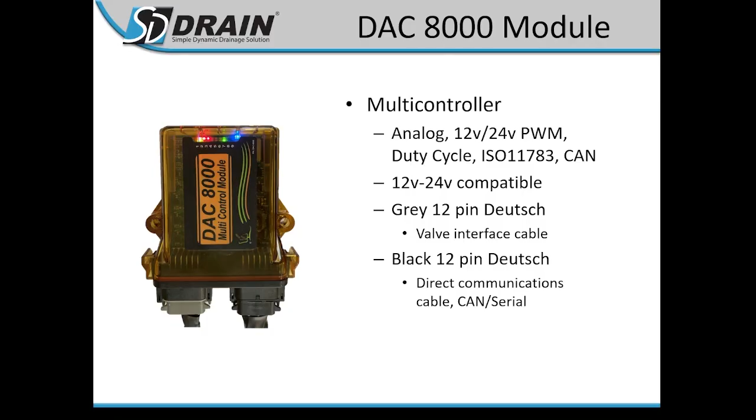Attached to the controller are going to be two plugs. There's a gray plug and a black plug. The gray one is going to be your power and valve interface cable, and the black one is going to be your communications cable. So if you're running a slope sensor for slope compensation or control, you guys plug it in there. Also for your GPS, so if you have a John Deere globe, you plug your GPS into the controller, and then everything is streamed to the monitor wirelessly. So just check that out, make sure you guys have that in the cab when you're setting up for the year.

Support, we have a couple options for you guys. We have sddrain.com. This is a website you guys can go to, and in the top right corner there is a menu. Hit the menu in the drop down, and there's a troubleshooting tab, a resources tab, a training tab, stuff like that you guys can go to, and we'll cover that here at the end.

But just wanted to let you guys know about that. We also have the online chat windows, that's the Let's Chat icon for quick questions. It's not necessarily our main tech support, but if you've got questions, just chat in there and we can help you out.

Otherwise, for hotspot support, we utilize an internet hotspot, which is a subscription you have to pay for on your phone, so check if it's unlocked with your provider. But if you've got it, we can use your hotspot to connect to your computer. Turn the hotspot on your phone, connect it to the SD drain tablet, and then click on the icon on the left, down here on your desktop. Click on that and it will open up. It'll give you an ID and a password. You will then give that to us when you call in, and we can log on and help you out with any problems you might have.

John Deere installation for guys running green tractors. On the back of your tractor, sometimes you'll have to remove the slow moving vehicle sign. It's a 10-pin MetroPack connector. When you plug our harness in, the valve interface cable into your tractor, and then provide power, turn your key on, what you'll see is auto with a line through it on your SCV screen. For some of the older tractors with the SCV screen in the back right corner, you're going to see EC on that number 1 hydraulic. That just indicates our controller is plugged into the tractor. If you don't see any of this, likely something is wrong. Power cycle sometimes works. Check your pins, check power, and double check some stuff. But when you turn the key on, you will see auto with a line through it. And remember to have your John Deere tractor off when you're plugging in that cable. Everything off.

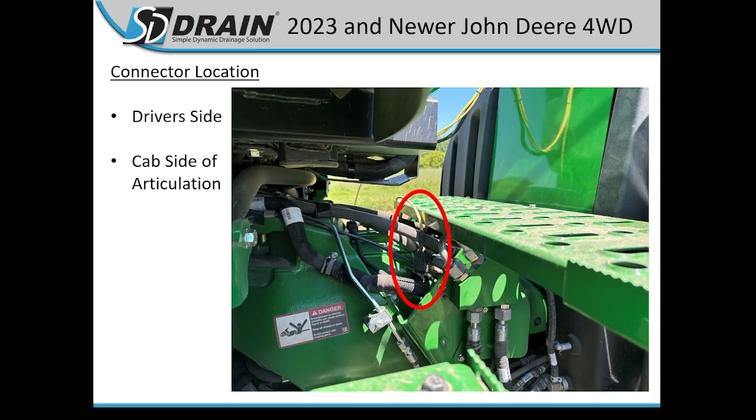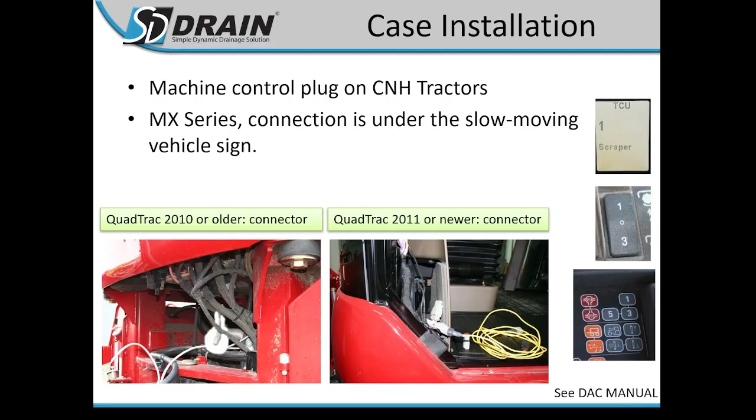Case installation, guys running red tractors. 2010 or older, the connector's on the outside of the cab in the back passenger corner. It will be draped somewhat like the picture on the bottom left. 2011 or newer, the right picture is all inside - open up that big door and you'll find that six pin connector. Again, it's just plugging a cable in. On the right side, we've got 2 pictures of 1-3 switches. One of them, that top 1-3 switch, or the middle picture, is an older style, 2010 or older I believe. 2011 or newer is going to be all of the keypad style, the bottom picture. So making connections, and then showing you the place where you enable your cutting blade.

AFS Connect cabs, front wheel assist. These new ones, they're on the back of the cab underneath the slow moving vehicle sign. Take the panel off and you'll find the connector on the right side by the fender.

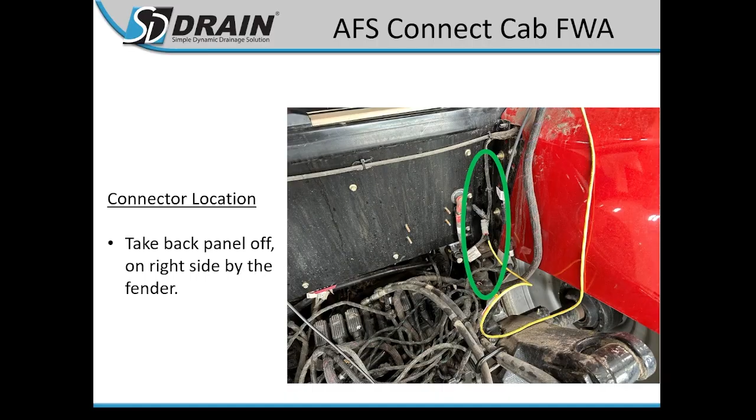So getting to those AFS Connect cabs again, the new armrest - you will have to do some setup on this. You have to turn on your A and B auxiliary control valves, map them to the corresponding remotes on the back that your elevation, like your up and down with your scraper, is set up for. And then now we can control that. You also have to set up your buttons to enable that. I usually tell guys to use one of the keys in the gray keypad here. You can program these to do different functions throughout the tractor. Once you've programmed them, it will now let you enable and disable the control on A and B, or just A or just B, depending on how you're set up.

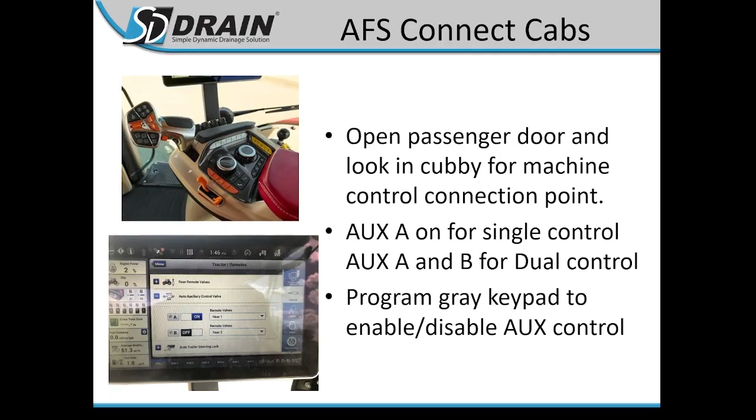External valves are for guys running older tractors without electronics, or guys running new tractors we can't plug into, like Fendt tractors. We cannot plug into those, so we have an option for you: an external valve. The nice thing is if you have to buy one,

it makes it easier for you guys to swap tractors. If you go from green to red to John Deere green, all you do is hook up to your scraper, plug in your hydraulics, and you're usually off and running. You might have to adjust your flow up and down a little, but typically that's all you need to do when switching, as long as nothing has changed throughout the year.

So take advantage of that. External valves come with a weld plate, so if you need to move it between machines, it's easy to do. There are 2 bolts that attach it to the weld plate, so you can move that in between machines.

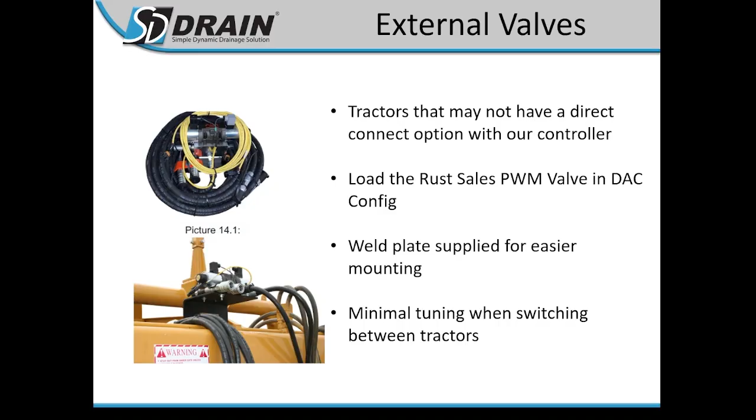John Deere GPS configuration. We went through some of the cable setup, plugging into your tractor interface. Now we're going to talk about the configuration of your John Deere receiver. Starfire 3000, 6000, 7000, 7500 globes — it's all the same configuration: baud rate, hertz, NMEA sentences, and then your tilt compensation.

Just go through that on your John Deere display, and then you guys can use your John Deere globes for ditching. It has to be RTK quality GPS.

The programming kit is more relevant in ditch work because we see more guys switching between towers all the time. And like we mentioned before, the towers are slowly going away, so John Deere isn't managing them anymore.

So as they take the towers down, this kit will eventually become irrelevant. But until then, it allows you to switch between towers without having to grab the globe off the scraper, put it on the tractor, program it, grab it off the tractor, put it back on the scraper. That's a headache, so we came out with this kit.

All you do is tee it into your ISO plug on the back of the tractor, run an extension up to the cab, plug it in, and make the connection. You'll see the globe pop up on your screen, change your settings, and then unplug that cable up in the cab with you. It's pretty simple to use, just for guys who are switching between towers all the time.

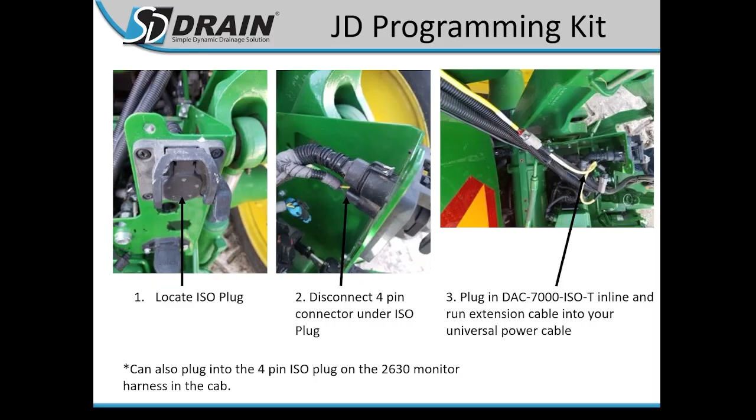Trimble GPS configuration. Before we talked about how everything is wireless, but you do have to make a hardwired connection to program these receivers. A 372 is going to be my example.

What you'll do is move a serial cable. There's a main harness, it's labeled, with a green band — that's your GPS. You will move that up to the top right port on these tablet displays, and that's a hardwired connection to the screen.

That's COM1. You'll then go to Ag Remote, click File, Connect, and then follow our instruction sheet on how to program these globes. It's about a 15-step process, so it's a lot easier to point you to the manual that'll walk you through it than to try and explain it here.

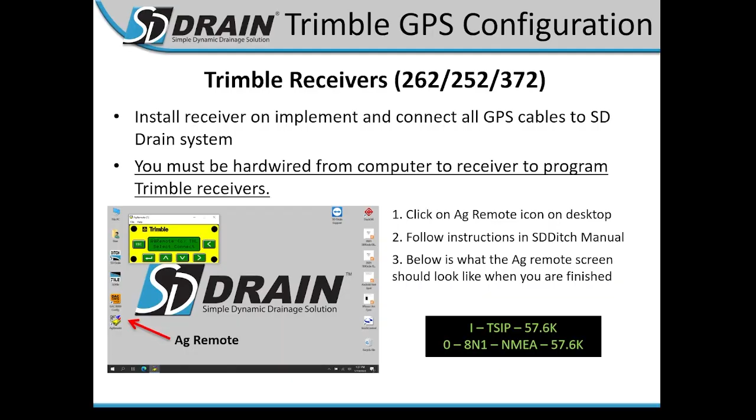Ag Leader 6500 and 7500 globes are a little more involved to program. From our instructions, it's actually a two-step process. You connect to it with your phone, send some commands, and that allows us to connect to it on our computer.

So again, it's a hardwired connection when you're programming these, and then once you're done programming, you can move that cable back and run wireless again. Just know they work just fine — they're just a little more involved to get configured.

Okay, data management. We're going to go through the program a little bit. 3.4.0 is the most current version, and we're recording this on February 6th, 2026.

Hit agree, and then the first page that pops up is all of your file maintenance. This is how you guys keep track of your data. You can add different growers, different farms, different fields by hitting the plus buttons, and it'll give you a text box to type into — enter the name of a new field, hit OK.

I'm going to hit cancel. So SD Drain Ditch is my grower, Farm is my farm, and I've got a field. I have a pre-designed plan so I can show you guys what the side profiles look like and what surveying looks like, but I'm going to go to Field.

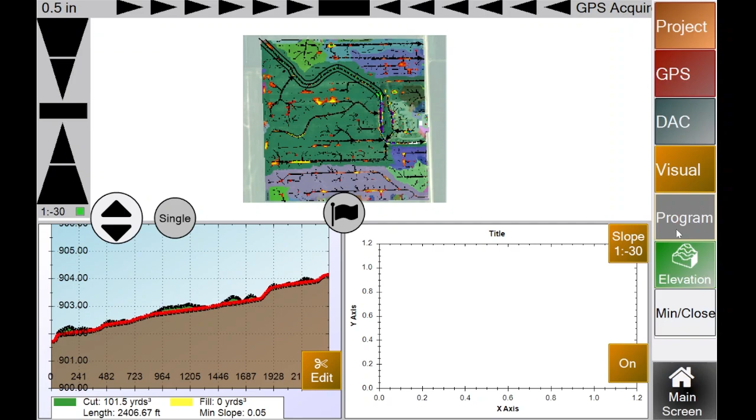And there we go. We're going to shut off our control and shut off our GPS because it's going to bark at me. And then I'm just going to quickly reset some settings back to defaults.

So for new guys running and setting up, or even guys just checking settings, I recommend that you guys all go through your settings at least once before you start ditching to make sure that things are going to be designed the way that you want them to be.

So I'm going to go to settings, program, and machine. I want you guys to do the same, check all of these settings to make sure none of this has changed. If you've gotten a new scraper, you'll have to go in and enter new settings, new ditcher. If it's a direct mount, even if you've got a new tractor, make sure you guys check all of these settings and verify that they are accurate.

Blade to ground, we can calculate with your GPS. Since we've already gone through the GPS calibration, you can use the calculator here to auto-calculate your blade to ground. If you click on this, it tells you to put the blade on the ground, hit OK, raise it all the way up, hit OK, and then we auto-calculate your blade to ground.

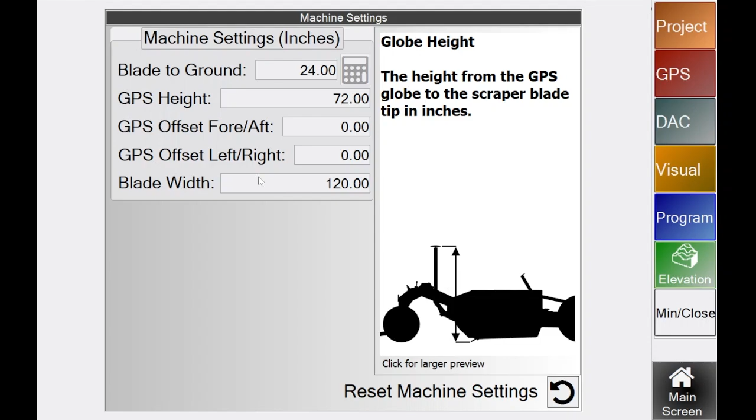GPS height, you'll manually measure this, it's from the globe down to the blade. Fore-aft will be how far ahead or behind your GPS receiver is from the blade, and left or right is just your offset left and right. So measure all those in, and then put your blade width in. Make sure everybody checks that before they start ditching.

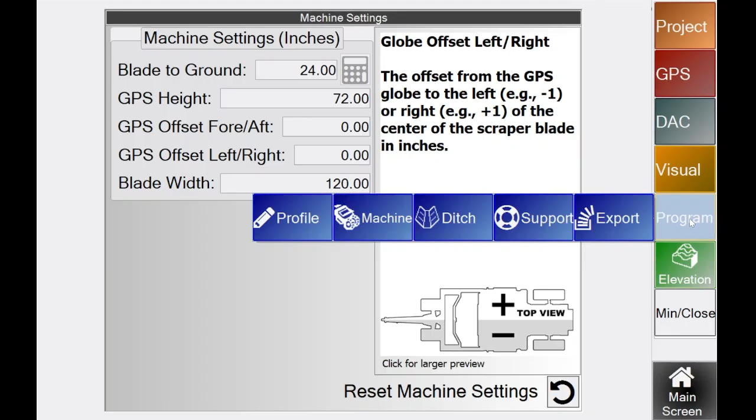And then profile will be the next page that we go into. This is all of your drain design settings. Min grade, the first one on the list here, is going to be a minimal applied slope. So if it's a perfectly flat survey, we are still going to apply a 0.05 grade, just to ensure that water will flow. If you can get a 0.05 grade, that's 0.05%.

That's great, we want you guys to try and stick there. We do understand that it gets flatter in some areas, so adjust when needed. But 0.05 is what we try to encourage guys to try and get. Max grade, we'll kind of talk about this later.

Pass depth, in certain settings, this pass depth affects how much dirt is cut when you guys make a pass. We will talk about that in some videos later. DGL offset is the extra amount of dirt cut out throughout the line. Even if there isn't any dirt that needs to be removed, your DGL offset will cut out just a little bit more. In this case, it's set to a half inch more dirt no matter what.

And DGL is the design grade line, so that's the line that SD Drain is going to say this is where you should cut to. And like Luke said, a lot of guys like to just go a little bit deeper than what that design grade line is, so it's just like a little bit of an offset from that.

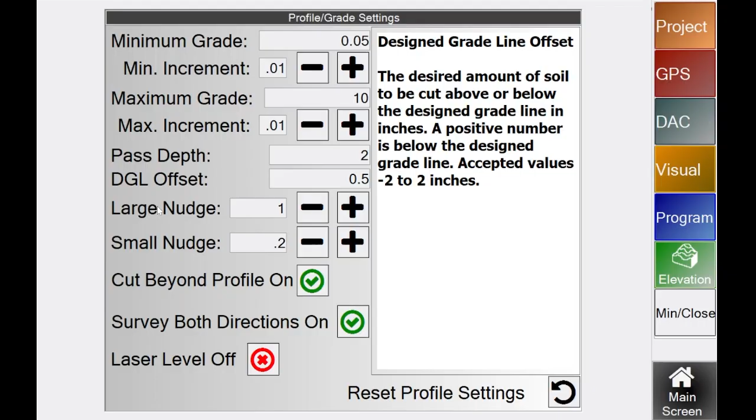The next thing we're going to talk about is your large nudge and small nudge. We'll cover those here in a little bit.

Cut beyond profile: when surveying, you have a start point and a stop point, where you hit start survey and stop survey. Sometimes you can't get all the way up to where you want to be when you hit stop survey, like at a culvert. If you're surveying straight up to a culvert, this feature automatically extends a line 100 feet past your stop survey point, so you can keep cutting. You can even cut perpendicular to the ditch instead of parallel, going right up next to that culvert and cutting right next to it. It might not be exactly where you want it since it's a false profile generated with this cut beyond profile feature, but it'll at least cut to your minimum grade beyond your survey.

Survey both directions: this will ask you whether you're surveying to the outlet or from the outlet. You guys make that decision, then go ahead and run your survey.

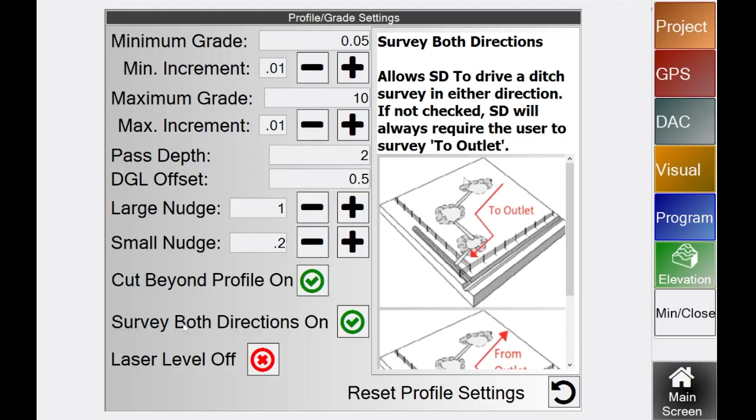Laser level is pretty self-explanatory. You turn this on, set a grade, and then do your survey. You can survey and cut in any shape or direction and cut a lasered ditch. It doesn't work exactly like a real laser, though the set grade functions the same way. With a real laser you can't go in many different directions, but with GPS, we can now survey in an S shape if we want, unlike lasers where you mostly run straight grades.

So we've gone through machine and profile. Next, we're going to go to ditch.

Your ditch settings all have to do with your widths. As you make projects wider or narrower, you'll want to change the widths of certain parts of your ditch. You'll run through this yourselves. I'll cover backslope settings in some other videos, but ditch width is what I want you guys to set right out of the gate. Set it to just a couple feet wider than your scraper. I usually set it so if I have an 8-foot cutting blade, I'll set it to about 12 feet. That gives you enough wiggle room left and right in case you don't follow your ditch bottom exactly. We'll talk about some of this stuff later.

All right, so we've done all of our initial setup: our system settings, machine settings, and profile settings are in. Now it's time to start and do a quick survey. Drive to one end of the ditch, or even just a short section in the field. Put your blade all the way up in survey position, hit start survey, choose which direction you're going, drive, and then hit stop survey.

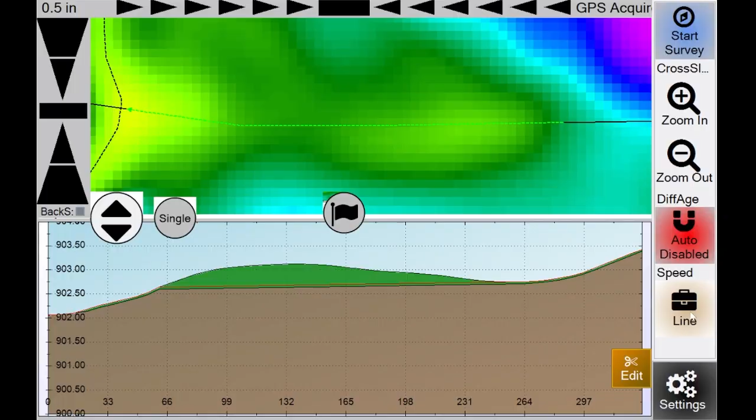A couple things that we can do there. I'm going to talk about the edit window. So just to make sure we've gotten everything set up—GPS connected, cables ran—now we've got things set up. We're out cutting ditches. So now we're going to get into more of the in-depth stuff on SD Drain ditch. What I'm going to talk about next is this edit window.

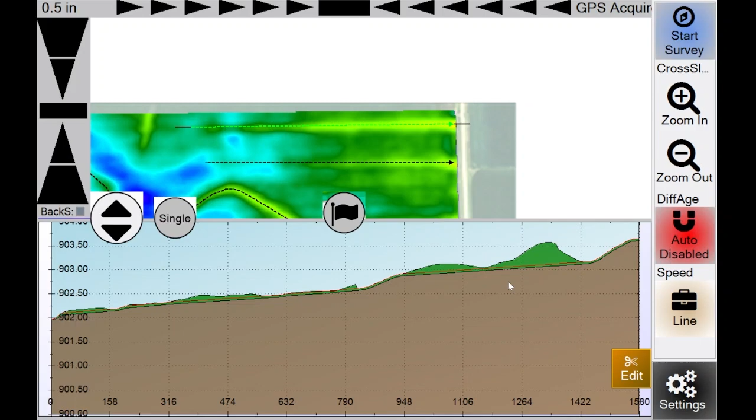You can edit or manipulate the way that a line looks, and it will change the way that it actually fills or cuts. So if I go to this edit window, in this example, let's just say I surveyed through a pothole, and now I have to cut out all of this dirt to make water flow from here to my outlet. Well, let's just say I'd rather fill this in.

What you can do is go to this edit window, and now with your finger, I'll use my finger, I can zoom in. Top right corner, there's a zoom in button. If I tap on top of this hill, I'm going to place a point here, and place a point here, and click preview, and now I'm actually filling in that hole. So yellow is fill, and green is cut. I can do it again if I would like.

So move this around, zoom in a little bit. I'm going to fill in from this point up to this point, preview, and now you can see I'm filling in 2 locations. So you'll probably end up moving all this dirt, all the excess dirt up into these fill areas, but it's just something that you guys can do with the edit menu.

You can also adjust your min grade, max grade, and DGL offset if you'd like. These settings only pertain to the single ditch that you're on, not like your defaults that apply to everything, but just the one ditch that you're selected on. If you don't like your changes, go ahead and click the undo button, and then undo again, and you can hit done editing at any point. So I'm just going to leave it back to the way it was.

So we're back here on our main page. Right after you survey, if you think that the ditch looks weird, you can go ahead and use the edit buttons and change the way that it will function. So just be aware of what you're doing—you are adjusting the way that ditch is going to be designed. So just keep track of that when you're making changes.

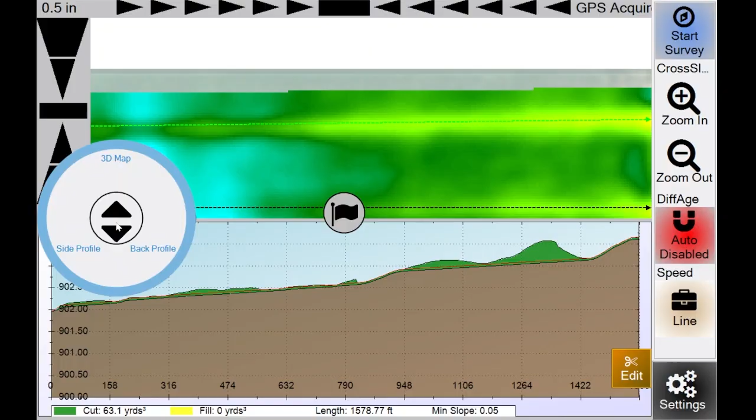If I tap this window button, I'll touch on that later. The first thing we want to talk about is 3D map. If you have LiDAR data loaded, you guys can click and use this 3D mode, and if you want to exaggerate your 3D elevations, you can use this slider here on the right. So 3D just helps you find those depressions a little bit easier. I'm going to go back to my overhead view.

Back profile, this is for doing back slope. I will talk about this later with some videos that we will go through.

So we have three layers loaded up right now. We have the lines that you brought in, then we have elevation—that's what Luke was referring to as the LiDAR data, the elevation data that you'd need if you want to look at it in 3D. And then the other one is just a background image.

And we do have a background loaded up, we're not looking at that one right now. There's our background image, the flow depressions map. And again, you don't have to have maps to ditch, it's an extra feature, but I think it's a very valuable feature to have these background images show you exactly where to put the ditch. We'll talk about maps later in the presentation.

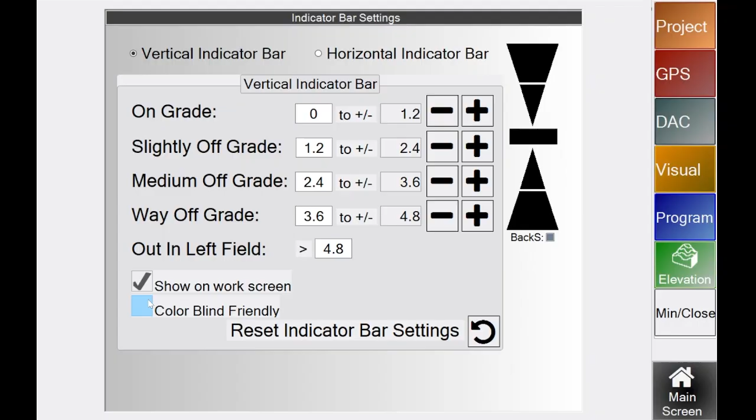Visual, indicator bar, map will be the next one. Again, this one has to do with colors. So as you guys visually see things, this is what you can change to change how they look. GPS symbol, we can make that larger or smaller, same with the outline. We can really customize things to make them easier for you guys to see as you're operating.

Units - if you want to change your altitude, show it in meters versus feet, or miles per hour versus kilometers per hour, you guys can switch those as well.

Flagging and logging, we will talk about this in a little bit - I've got some slides to show that. So the Show Manual Flags button, turn that on, and then enable visual logging - I've got slides to show you this as well. These are just some extra features. This one's for collecting data if you don't have good LiDAR in your area, and the Show Manual Flags button will be for marking out things in your field as you drive over them.

Next is DAC. We'll go over to DAC control, and this is really the only page I'm going to show you for the DAC stuff because it's really the only thing you need to see to make sure your DAC is connected. In the top middle it will say DAC detected, and I will show you with some slides what this actually looks like. Whether you're wireless or serial, just make sure it says DAC detected. Everybody running the newer tablet style will be wireless, so make sure it's selected wireless, hit play, and you will see DAC detected in the top middle.

GPS control is going to be the same way. GPS control here will say GPS detected in the top middle of your screen. Guys running the PX5R, you will set COM2, baud rate 57600, and set to serial. Hit start, you will see GPS data down here, and it will say GPS detected.

Everybody running, let's say, John Deere receivers, Trimble receivers, Ag Leader - you guys are all considered smart antennas. You feed all of your data to the controller wirelessly, so you need to be set to wireless for your GPS control. Your GPS is going to plug into the DAC 8000, and then the DAC 8000 is going to talk to the computer wirelessly.

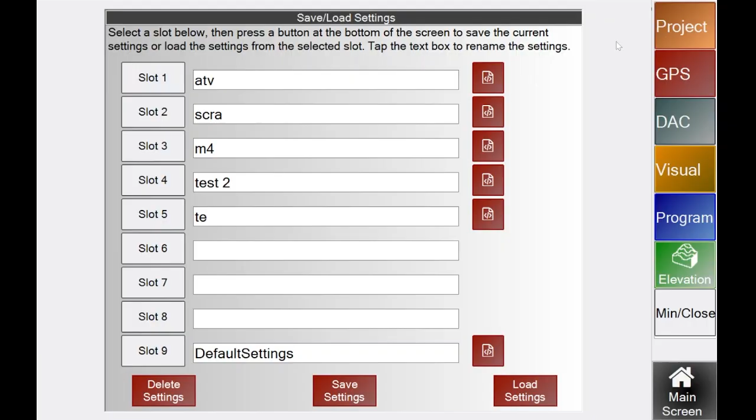Project, that's the Save Load Settings tab. Layers brings you back to this page right here to let you load different layers. Let's just say I don't want to view my watersheds - I want to see my flow depressions. You guys can load different layers and then keep on ditching. Again, switch back to watersheds, or even to the NAIP image - you can decide which ones you want to view. I'm going to go back to watersheds. So then start project gets you back into there, and now you're off and ditching again.

New project just brings you back to the main data management page.

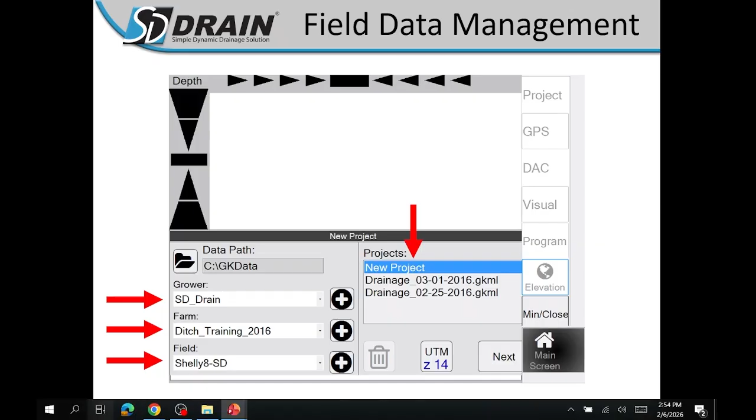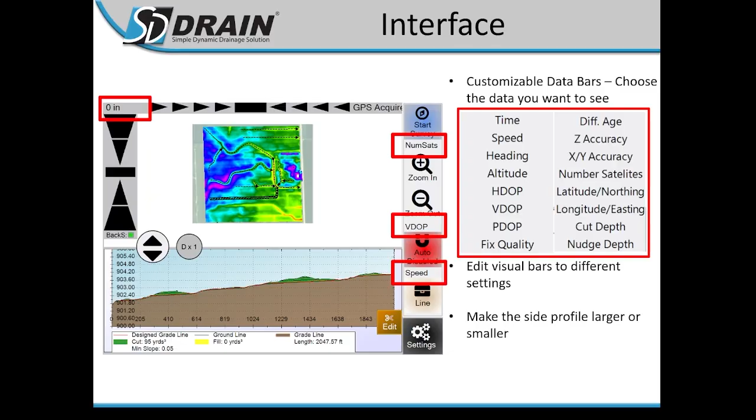So this is going to be on your run screen, so when you're actually ditching you would be able to see certain values. Like I think Luke had talked about the VDOP - you could change it to fix quality. If you were wondering how come stuff isn't working right, or if you're getting some kind of error, you can have these quickly to look and see different data streams that are coming in. So these are the data streams that you can choose from to just have a quick look on your main screen.

Side profile, we touched on this a little bit. So green, you remove all of it. Red line - or in this case it's blue, so this user changed the colors - blue is your design grade line, and the final grade line is the black line, and that's where your blade cuts to. So that's the one that you can nudge up and down to change how the ditch gets finished. But the designed one is the one that SD Drain gave you and said, hey, this is the best fit line for this ditch.

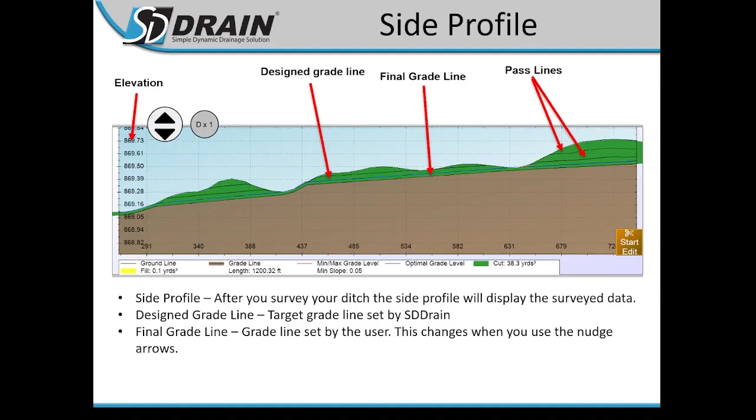And you can see that there's pass lines in this one. There are 3 different ways to cut the ditch - we'll get to those in a minute. When we were showing you the side profile of the ditch earlier, it was like a single cut. This one here is set up for a pass cut or a design cut. That's when you get to see the different pass lines. Right, yep, and actually we'll talk about that here in I think it's a couple slides.

So first we'll touch on the start survey buttons. So start survey at one end of the ditch, choose your direction you're surveying, and then you drive that ditch.

During your survey, you'll get an extra button that says pause survey. This is used for surveying through things, like if you have a culvert in a road ditch and you want to include that in your survey. Start your survey, survey right up to the culvert, hit pause survey, drive over to the other side, hit resume, and continue your survey. Get to the end and hit stop survey, and that will generate a whole side profile with the culvert included in your survey.

Survey both directions: click start survey, and you'll either be going to the outlet or from the outlet, whichever you decide. We don't do any auto calculation of which way the water should flow, so if you screw it up, turn around and resurvey. This is when you have the survey both directions button depressed. If that's off, you'll always go high to low. The default, before this feature was added, was you always survey high to low and then start cutting.

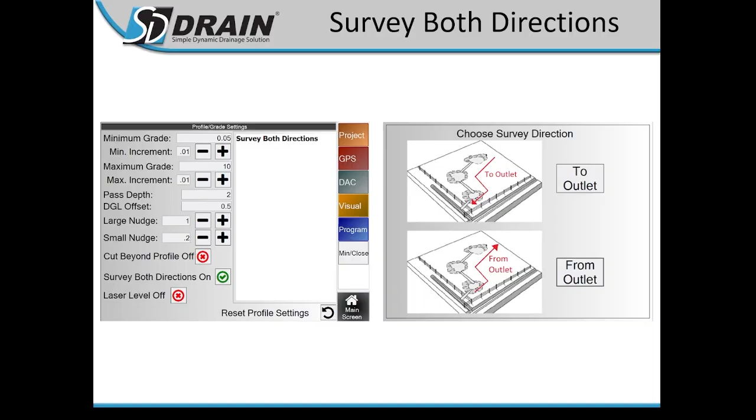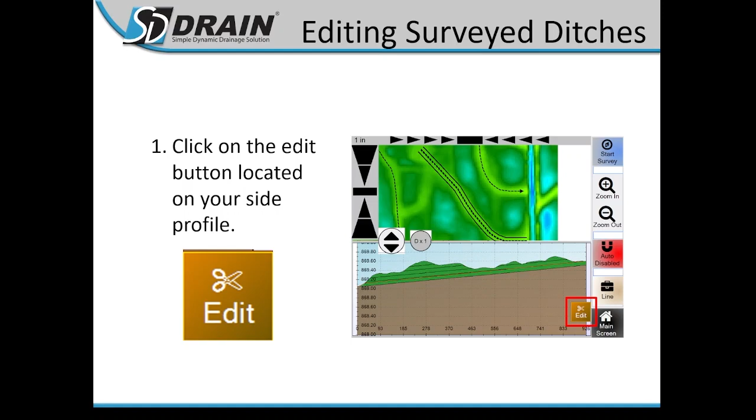Editing surveyed ditches, we covered this button again for editing the way your ditch is designed. If you want to fill in holes, remove dirt, change the grade, or change offsets, you do that in the edit window. I'd say 80-90% of guys just take the ditch that SD Drain gives you and start cutting.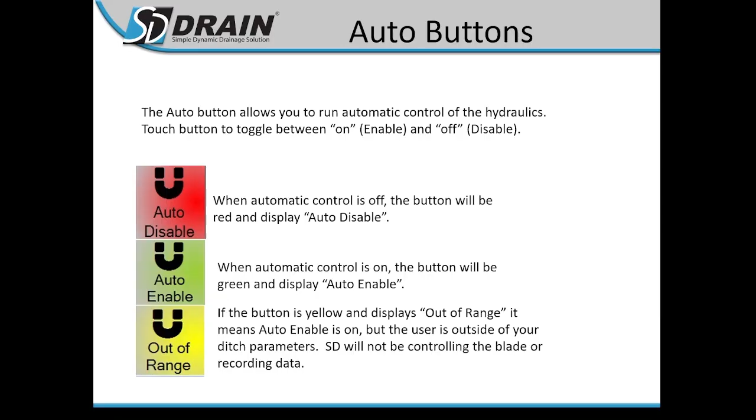Auto buttons: we have auto disabled, auto enabled, and out of range. When control is off, you'll see a red button. When control is on and you're in the ditch parameters, you'll see auto enabled. When you go outside those parameters but are still enabled, it will say out of range. So essentially you can just leave the screen alone - as soon as you hit auto enabled, you don't have to touch it anymore. Just start cutting. When you turn out of the ditch and get far enough out, it will say out of range and stop controlling. This is just to show you what those different colors mean.

Different cutting modes, like what Scott was talking about earlier. We have design, pass, and single, and these are all related to your pass depth and DGL offset. We've got 3 different options: design, pass, and single. Design works in a stair-stepping type cutting motion where it'll only grab the top 1, 2, or 3 lines available to you for cutting.

Pass works a little differently - you can tell it what line you want it to cut to. Every line you see here is numbered from the bottom up: P1 is final grade, P2 is the next line up, then P3, P4, P5, P6, and so on. It only gives you the top 3 lines available. So if you selected pass, notice here I've got P3, P2, and P1, and your blade is only going to cut to the line you tell it. If you're outside of an area like this, it will always cut to final grade - like up on this slope, it will be cutting to final grade. Once you get here, it will move up to whatever line you have selected. I have some videos showing you all this, so I'm not going to explain much more.

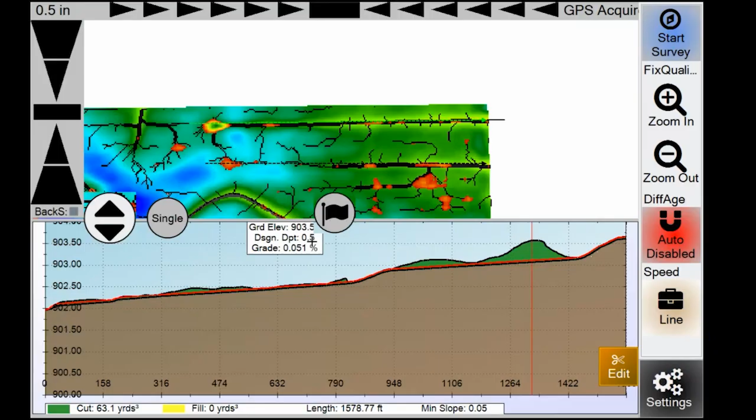And then also single - notice when I click this, my lines disappeared. So now we're taking everything out in one cut. If you click on this, it's roughly half a foot of dirt. This is 6, so 0.5 is your design depth - that's how much dirt you need to take out.

We're going to watch a video here. In this demonstration, I'm using design cut, taking one pass line at a time. Notice how my indicator just cuts out that top layer as it moves back and forth. We are in D times 1, meaning it will take one line every pass back and forth. So we're removing the green on this top pass line, and when it steps down here, it will grab the topmost line, and anywhere outside of that, it will just follow the final grade line.

The nice thing is we'll get to the end. I'm going to end up turning around, so let's zoom up here. Notice I switched it to design times 2. Now when I come back along this line, it is going to cut out the next 2 available lines. You'll see my GPS cursor or blade indicator cut out the next 2 lines versus D times 1, which would just be 1 line at a time.

So is it called pass depth? Yep, pass depth. If you set your pass depth for a foot, one pass is going to be one foot, two passes is going to be two feet. I think you can go up to depth times three, that's the max to choose. All you do is tap on this cut mode button to change how the program cuts.

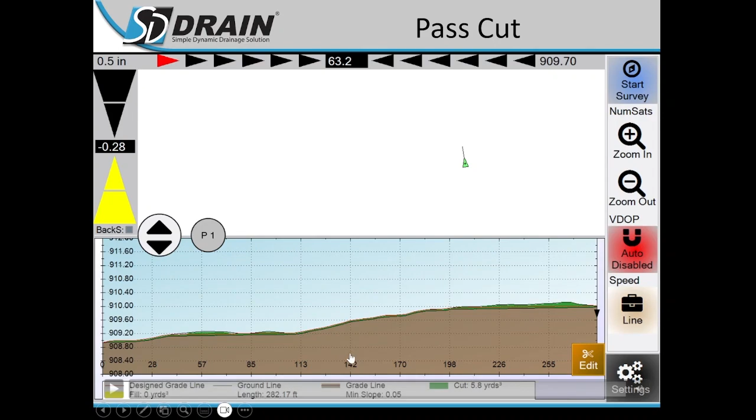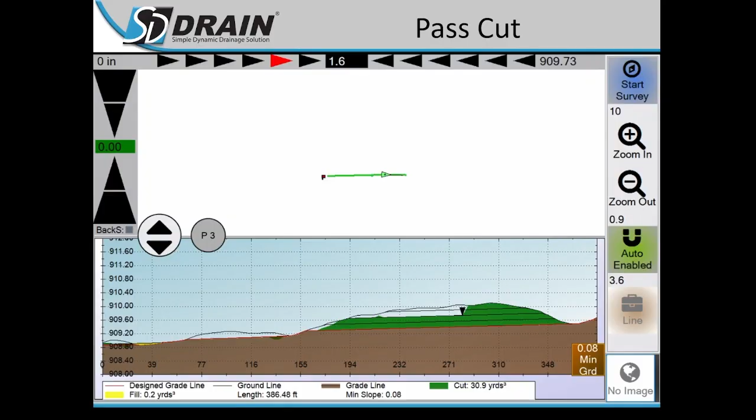The next mode we have is called pass cut. So what this does is, notice here I'm going to select pass 3, and it's only going to cut to the 3rd pass line up, right along this area. Everything is numbered from the bottom up, P1, P2, P3. As you drive in the green areas, it will auto-populate the top 3 available lines. In this instance it would have given me 4, 3, 2, and when I come back I'm going to reselect the next available line. So you have to physically tap the P3 button to select the next pass, but it will only cut to that line.

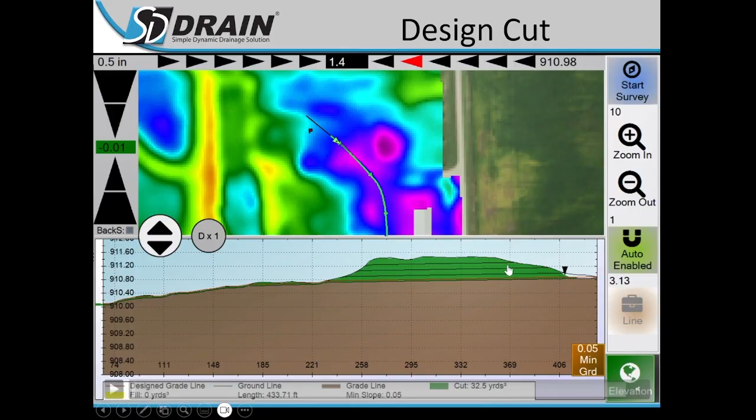Let me go back to design cut here really quick and explain my reasoning. As you're cutting in this area you might get some stair-stepping effect because the blade has to jump up, jump up, jump up in those areas. What happens is you could start to create some choppiness in your ditch, and the next pass coming back, your scraper has to compensate for all that jitteriness it might have created in that stair step. So what pass cut does is let you select a line and it will only cut to that, eliminating that stair-stepping effect. A lot of guys like that because then they can get to that last pass and it's going to be like a nice smooth load on the whole pass.

Yep, so when you turn around, the next one you could select would be pass 2, and that would leave one more line left, which you could take on your final pass to make it nice and smooth.

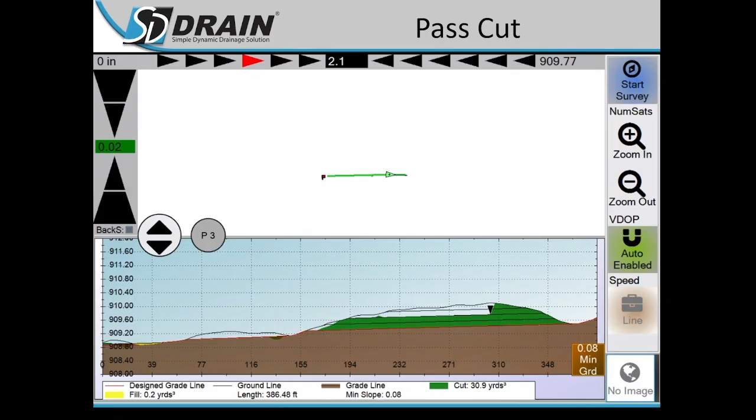The last function is going to be single cut, and it's pretty self-explanatory — you are cutting everything out in one pass. In areas of the ditch I'm covering right now, that's probably fine if you're taking out anywhere from 2 inches to 3 inches of dirt. But when you get into other areas where it's like 10, 12 inches that needs to come out, then...

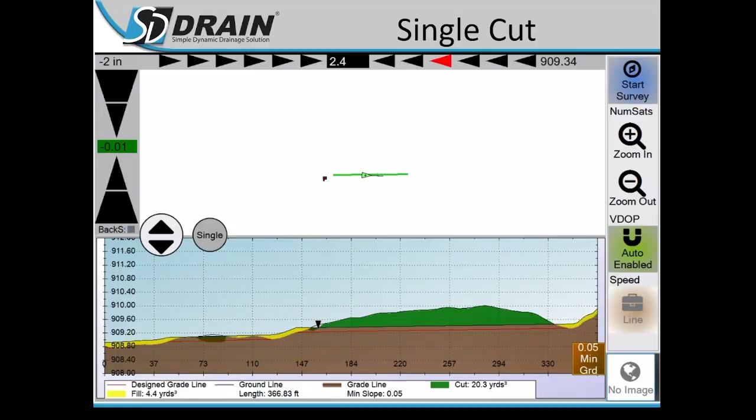what you're going to do in single cut is use your nudge arrows to nudge up. Notice I'm nudging up with those arrows on the left side of your screen, and that is telling my blade where to cut to. Now I'm going to keep passing over this — this is a manual mode, so you will need to nudge back down to keep cutting more dirt out, so just be aware of that. Remove the green on this pass, turn around, nudge down say 2 inches, and use your nudge value in the top left corner as a reference. So now what I would do is nudge that down to -2 or even -1 to make my next pass.

So we are in single cut, and it's just another way that you guys can cut your ditches. There, I nudged back down, and now I would take my next pass going the opposite direction.

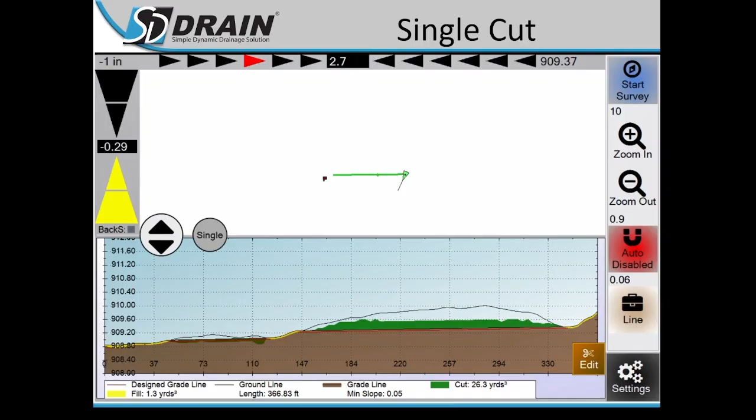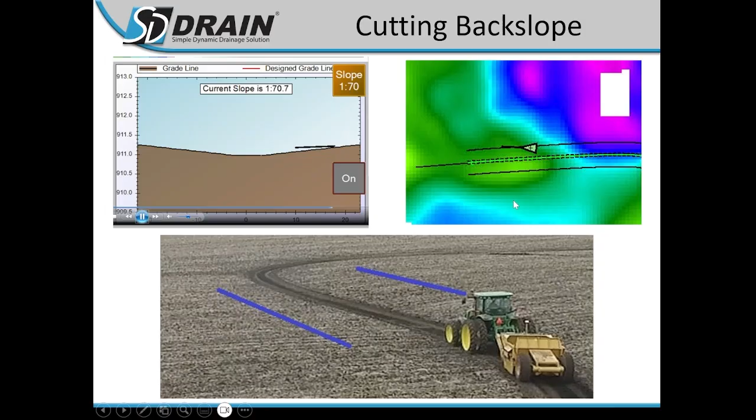Cutting backslope — for guys who are now past the ditch bottom cutting portion and ready to start cutting the backslope, to make that really nice blend out to daylight. So you're blending the ditch bottom out to daylight. Just an example here, see my backslope window — I've got my blade indicator right here showing my location in the back profile and my location in the ditch. See, I'm way up in my backslope area, and I'm just showing you here what backsloping is talking about.

So, cutting back slope. In this example, I've already surveyed my ditch bottom. I've cut out all of the dirt from my ditch bottom, and now I'm starting to work on my back slope.

The way to turn this screen on is you go to the window button, click on it, and then click the back profile option in the bottom right corner. That will open up this back profile window, and then make sure you click the on button to make sure it says on.

You'll then set your slope ratio. We use a rise over run ratio, so 1 to 70 - 1 foot rise over 70 feet of run - is the slope that will be applied to this area. Some guys ask how do I know what value to put in there.

The easy way to look at that is to go to the apex or the bank of the ditch. That white window in the back slope window is going to tell you what your current slope is. If you're on the edge of where the back slope is, you can use a value close to that for your slope value.

So what he's talking about is drive out. If you turn your back slope function on and then physically drive out to the outermost edge of your back profile, put the blade on the ground, and you'll see this bar display what the current ratio is. Just match that here with your slope button.

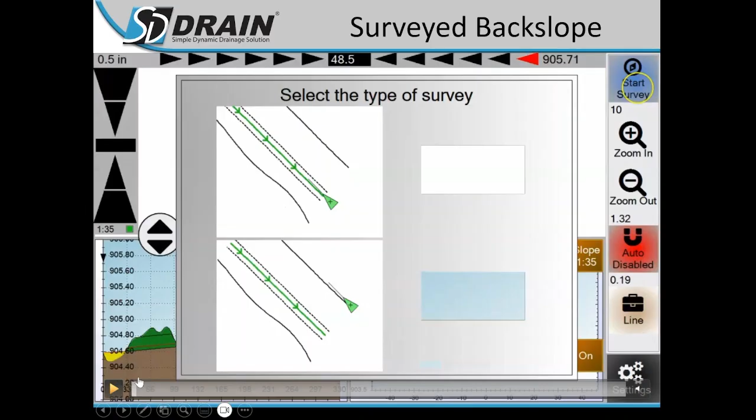So what we came out with was a surveyed back slope, where you actually survey the outermost part where you want your back slope to daylight. In this example, I'm going to start over again. I've already surveyed my ditch bottom, and I've got surveyed back slope checked on. So I'm going to drive out to the outside where I want my back slope to finish out at, click Start Survey, and then select Back Slope.

Now I will start surveying the back slope area on this side of the ditch. You can drive wherever you want. I could have driven out here, follow my mouse, and that's where my back slope would have finished out at. I'm going to drive, cut across here, cut across back towards the inside. Then once I get to the end of my survey on my back slope, I'll hit stop survey in the top right corner. So I've surveyed one side.

You could just do one side and work with the other one as a static value. That'd be just fine, but in this scenario I'm going to survey both sides. So I'll drive over to the other side, and once I get over there, I'm going to hit start survey in the top right corner and select back slope again. I'll continue driving exactly where I want that back slope to finish at—that blue line is my trail. So I'm surveying, get to the end, hit stop survey, and now you can see I have two generated back slopes, or back profiles, that I created because of my survey.

Now as I click auto enabled, I'm out of range—notice my cursor is outside of my parameters. But as I get back in range, you can see how my back slopes are a little bit different on each side. As I get within range, it will go to auto enabled and my blade will drop to that back profile. So it's going to control, control, control, and now throughout this whole area it will be auto calculated on the back slope. You can see my current slope is 1 to 42, somewhere in there, and it's changing all the time based off of my survey.

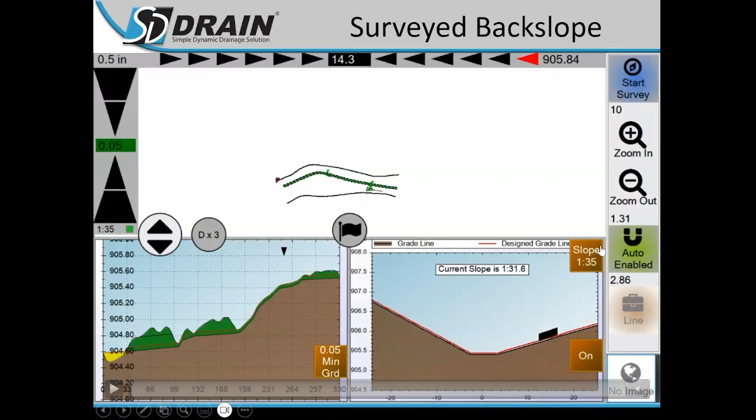We've got one more way to look at how you can do it—the mirrored back slope. What you end up doing is you survey one side, and once you're done with that, you just mirror that to the other side. So it's going to be that same value on the right-hand side of the ditch and the left-hand side of the ditch. Here you can see how they're both even—it's a duplicate of the one side that you surveyed.

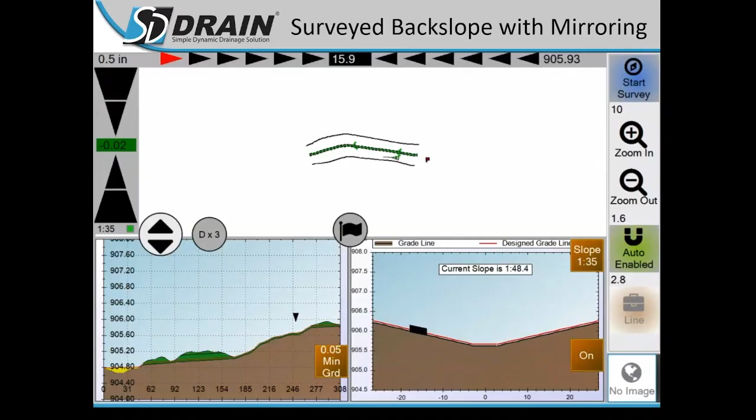It's a quicker way to get a dynamic value on ditches that would be pretty much similar on either side, where maybe just using that static slope might not work, but both sides end up looking very similar. Just by surveying one side, you get both sides quickly. You don't have to drive that other survey, and you get going and get out of the field quicker. That's the whole purpose of SD drain, to minimize the time you're in the field ditching.

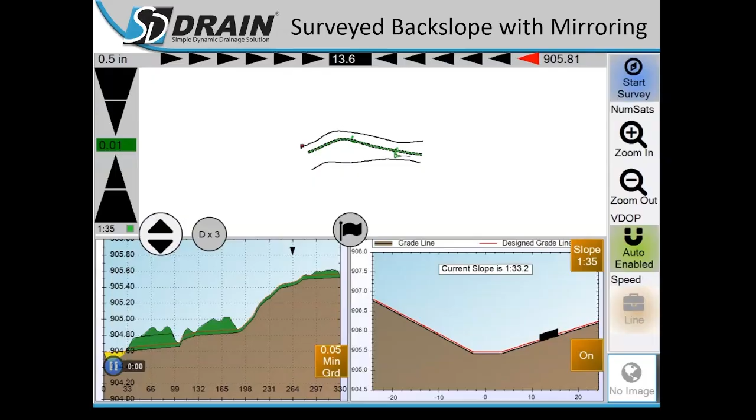Next, we'll talk about parabolic ditches. We've seen these more down south where guys are doing more custom stuff—let's say they've got a plan made up and some settings they need to adjust in the program. One of your settings is going to be a parabolic ditch depth; that is the ditch depth at the center, from the center out to the apex of your parabola—that is the depth it will be cut to. We also give you a reference at the halfway mark on this parabolic shape.

So at 27 feet out based off of my settings. If you've got a cross section of the ditch that is 50 feet wide exactly, what you'll do is set your back slope width to 50 feet, and set your back slope ditch width to 0. Then you've got a perfect parabola set, and it'll tell you what the depth is at the halfway mark on your parabolic shape.

So you'll run your surveys like you normally would, and depending on what your slopes need to be within those stations, from point A to B, they'll give you a value, let's say it's a 10th slope from A to B. You can set up your laser function, turn laser level on, set your grade to a 10th, run your survey of that station, and you might need to manipulate it with your nudge arrows up and down to get your elevations to match at the A point and B point of your survey.

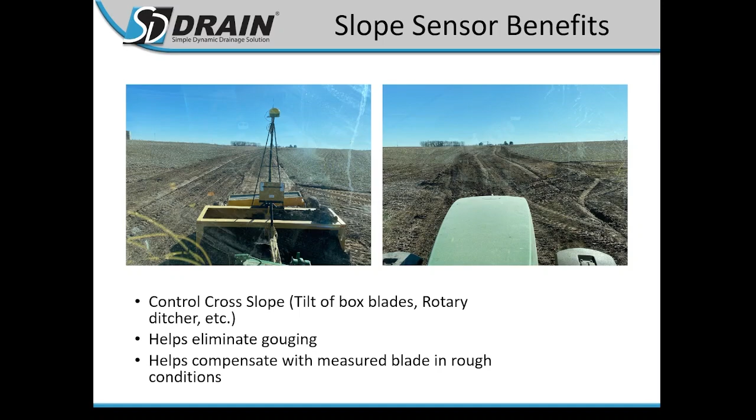Slope sensor benefits: we have cross slope control for box blades and some rotary ditchers like what we've mentioned before. We can control the cross slope if you'd like. Otherwise, we do have an indicate kit only for helping minimize the gouging on scrapers and stuff like that when you're ditching.

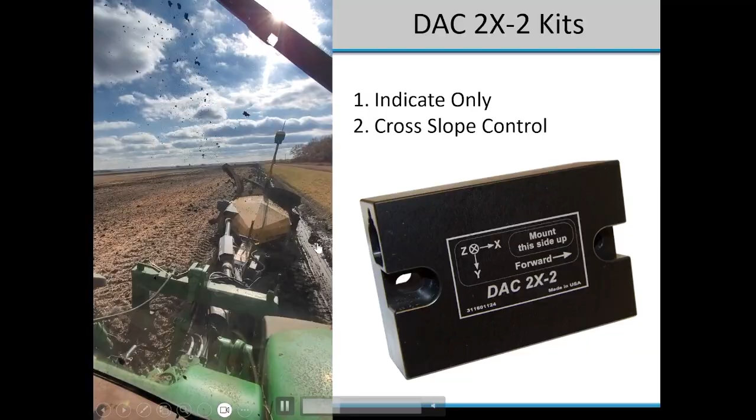Here's an example of a rotary ditcher being controlled on that back slope. So DAC 2X-2 kits, give us a call if you want to take advantage of that. Otherwise, call your dealer if you are further away, but if you're local, give us a call and we can help you out.

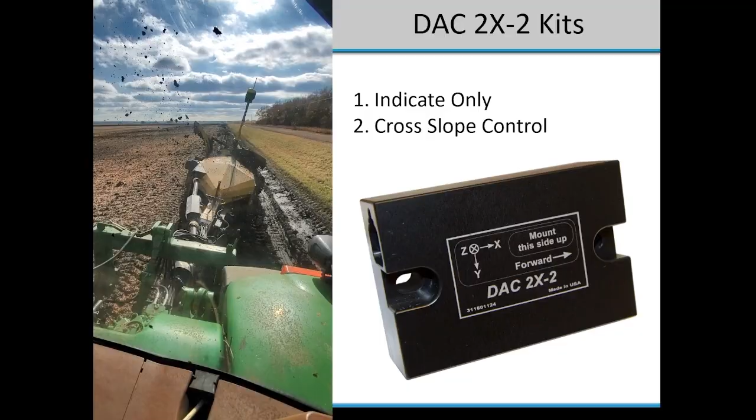Building a level pad. I'm going to go through the program to show you some of this, and we're going to talk about terracing a little bit here too. But first we're going to do flat pad stuff right away.

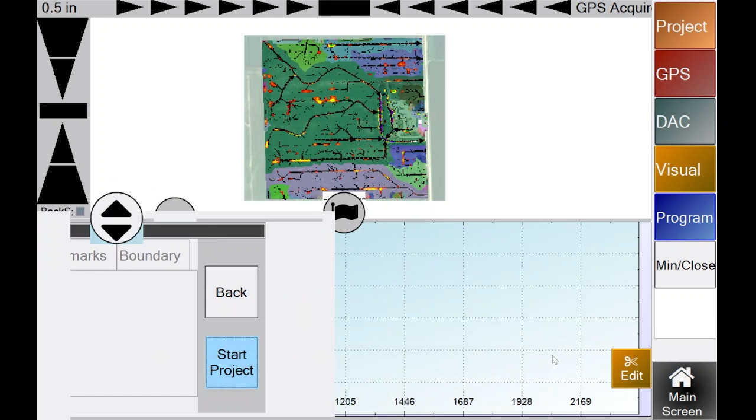I'm going to load a project. I have to load these just to show you guys a picture of how stuff will look. Start project. Okay, so what I'm going to do is use this ditch as my reference, just because it shows up the best, I think.

So for laser cutting, or creating flat pads, I'm going to go to Program, Profile. I will turn laser level on, go up here and set my grade to 0, since I'm going to make this perfectly flat. Hit Enter. I then will go over to Program and then go to Ditch.

Here I'm going to adjust the widths of some of my settings. If your project is anything greater than 500 feet, you will also have to utilize your back slope area. But if it's under 500 feet, go ahead and adjust that width in your ditch width setting. So I'm going to set this to 500 feet. Now you would survey down the center of that project, and that'll give you 500 feet wide of a working area to work with.

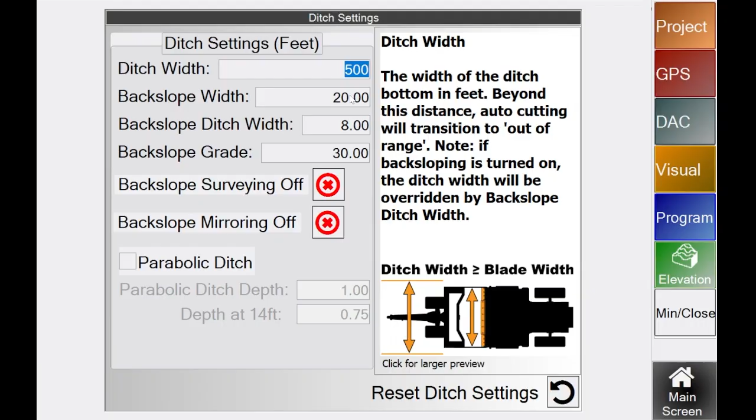In my example, I'm going to say I need to level out 1,500 feet perfectly flat, that's actually our maximum width. So I'm going to also adjust my back slope width to 500 feet and my back slope ditch width to 500 feet. And now you'll also have to adjust your back slope grade to 0. That just tells it that a 1 to 0 is perfectly flat.

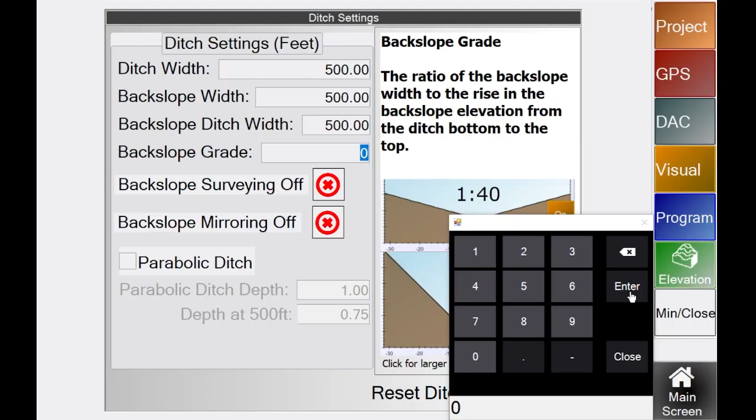So I'll go back to my main screen here, and now you can see what a couple of my settings have changed. I need to bring up my back profile window and watch this screen as I watch right around in this area as I cycle this on and off. Do you guys see those extra lines that appear?

So I'm going to leave this on. These are all reference lines that you can use. From dashed line to dashed line is going to be 500 feet, that is what your back slope ditch width is.

And from dashed line out to solid line, that is your back slope width. So 500 feet, 500 feet, and then 500 feet. That gives you a total of 1,500 feet that you guys can make perfectly flat. You guys can survey as long as you want, but for as far as width goes, it'll be 1,500 feet.

Now, let's say your contractor said, I want you guys to be at 903 feet elevation. So now you just nudge up to 903 feet and then start cutting. We don't have survey data throughout this whole area, so you might get to areas that need dirt cut out. If your scraper's cutting, obviously you need to remove some dirt, but just know that it will cut it to wherever you nudge your final grade line to.

So keep cutting back and forth, and then use it as a finishing tool to get this thing perfectly flat. You can drive in any direction on this. One of the things we talk about when you have the back sloping function on, you could always just drive perpendicular of your main ditch, and as you enter the back slope area, your scraper will take control and follow the back slope down and follow the back slope up. Even when you're doing your regular ditching, you can take advantage of that. So you can go any direction that you want when you're doing the level pad.

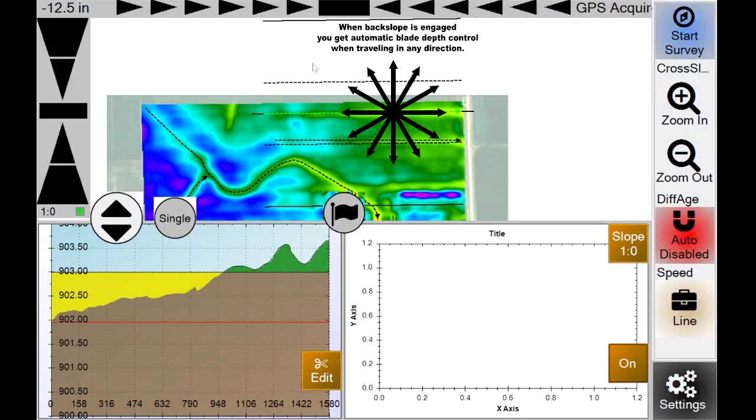Within these parameters, if you've got a box blade and you're just trying to pull gravel around and level things out, just start driving around and testing and seeing how stuff looks and where dirt needs to get moved to, and then just start driving.

So that is the level pad setup. I would save this now in your save load settings. Create a profile, save it as flat work with a box blade or whatever, and then you can easily load that. So we talked about your contractor having a reference point or a reference elevation.

Well, if you don't have that and you just want to match an area in the yard, what you would do is perform your survey like this, so you have a nice side profile, and then drive over to that area in the yard that you want to match your grade to. Drop your blade down to that location, and then you'll see somewhere along this side profile your blade indicator. Let's just say it's about at the point here, at this little knob.

What you'll do is just nudge down to that area. And now we'll call it right there. Now we are leveled to the area that you want to match in the yard. So another way to do it, if you don't have an elevation, you can match it to spots in the yard that are already to grade.

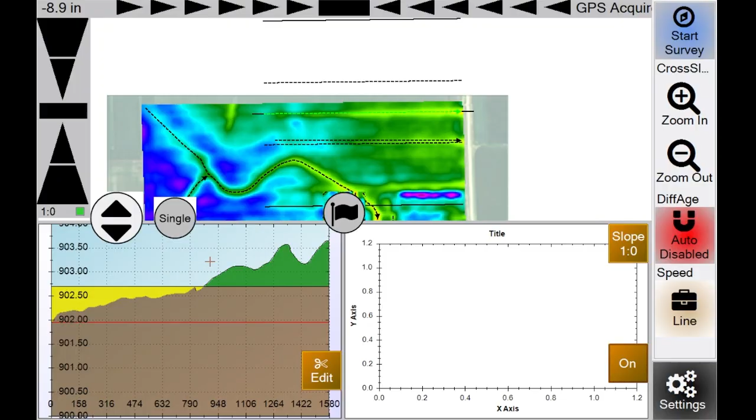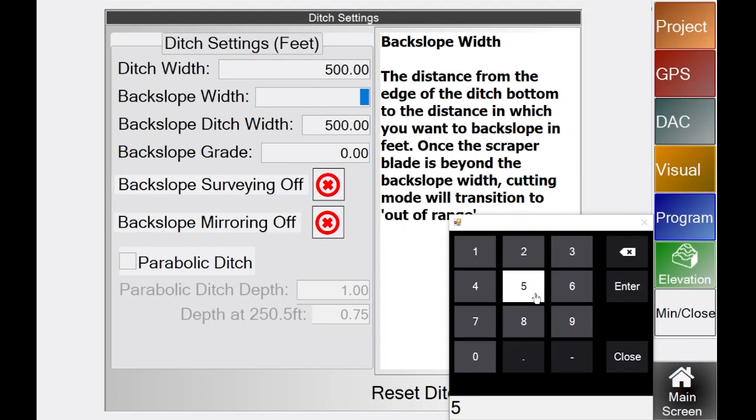Next, I'm going to talk about terracing and some of that setup. So I have to reset some of my settings. I'm going to change my backslope width to, let's just go to 50 feet. Let's change my backslope ditch width to 10 feet. That will be the top of the terrace. And then my backslope grade, we will adjust that here as we go.

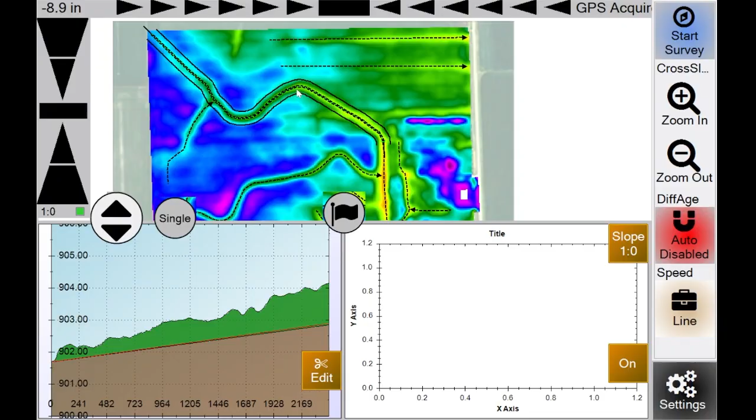So I'm going to call this kind of my example ditch. Let's just say from this point right here over to this point is going to be where I'm going to create a terrace. Let's say this is a hill right here. What you will do is survey right along the area that you want to create your terrace. I'm going to create this just as a best fit line. It's going to just follow the natural slope of the land. So just give me one second here.

So what you can do now is survey from this point over to this point, just like a ditch would. So if it's uphill, downhill, or however it works out, you can survey this point, and then to create the top of the terrace, you're going to nudge up however high you want to make the peak of that terrace. So right now, I'm just going to go like 24 inches. So there's 24 inches nudged up. Once you nudge up, you're going to start having to push dirt up or push dirt down to make this terrace work. And you can utilize your slope, back slope, as well as a negative ratio.

So I'm going to do like a -1 to 20. In 20 feet, this will have transitioned down a foot. So just do the math and figure out how you want it to blend to your field.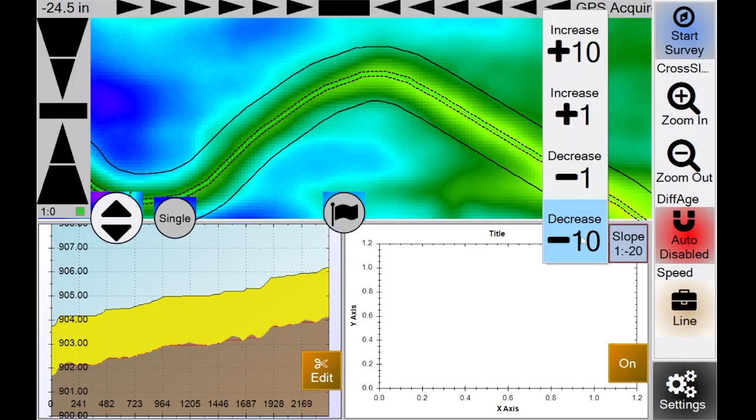Based off our parameters, from dashed line to dashed line is your 10-foot top of the terrace, and then everything going from dash to solid is now a 1 to 20 slope. You can do 1 to 10 if it needs to be steeper, or so on.

However you need to match that, you guys can do so. You're not trying to make water flow, so make sure you set your profile grade to 0. Then all you're doing is creating a wall in this area. There's no slope associated with it. You can see here how it's literally just matching the profile of the ground.

So survey from here or wherever your terrace needs to be, and then just start nudging up and apply a negative backslope to create that fall. And like what Scott talked about earlier, you can ditch and cut however direction you want.

So if you're pushing stuff up or pulling stuff up, work it that way. You'll have to start moving dirt to either push it up from the bottom or from the top, however that is. So that's creating new terraces.

And if you're just cleaning out terraces, you guys can treat them as ditches. So let's just say at this point, all my water flows down here and then flows out a drain right here. Treat this as two ditches.

You'll survey right along here at the bottom where the water flows. And then same thing here, survey it like a ditch down to this drain. So that's all you're really doing.

So then you apply a backslope. This would be a positive backslope because you are doing the inverse of what we just talked about. Survey right along here, apply a backslope correctly, and now you're pretty much just pushing.

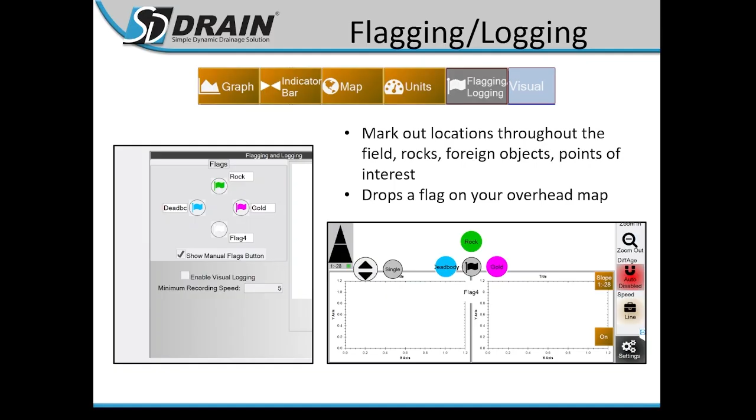The next thing would be the enable visual logging on this flagging and logging page. Check this on and you can record data throughout a field. Let's say you've got a big project that doesn't have good LiDAR, so you don't have a means to create a map. You guys can use this program, use a Ranger, use something that you can drive even swaths.

Try to do like 30-foot swaths back and forth throughout the whole field. Drive your ditch bottoms, drive your road ditches, drive any outlets, collect all this data, and then you can export this with the export button and the GPS log. It exports a shapefile, so you guys can create maps or have somebody create a map for you.

This is not, it's not in the program where you create these maps. You have to export the data and let somebody else do it for you.

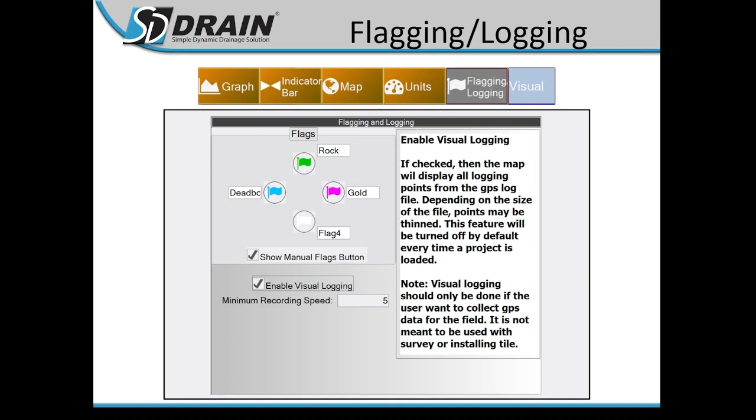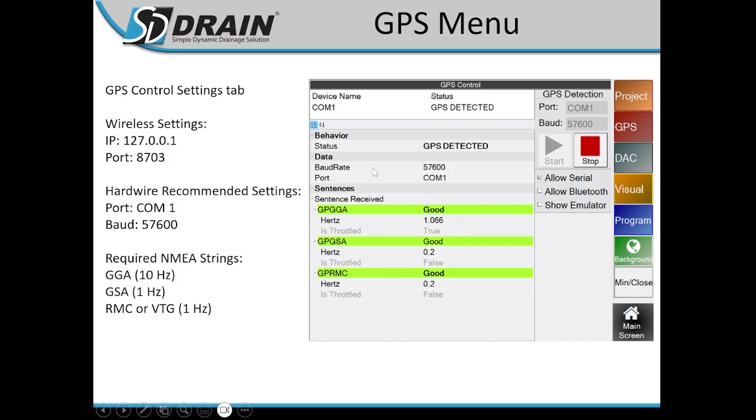GPS menu, showing you guys what the GPS menu looks like. GPS detected, this is a serial connection, so this would be COM1, the top right port on the computer. But normally guys would be set up wirelessly for all the new tablets, so just be aware of that. To give you an example of what it looks like connected, again, this is a serial connection, COM1.

GPS data, showing you guys what this page looks like with data actually incoming. The big thing is the RTK fix, that's why it's in red. The program's not going to work unless it says that.

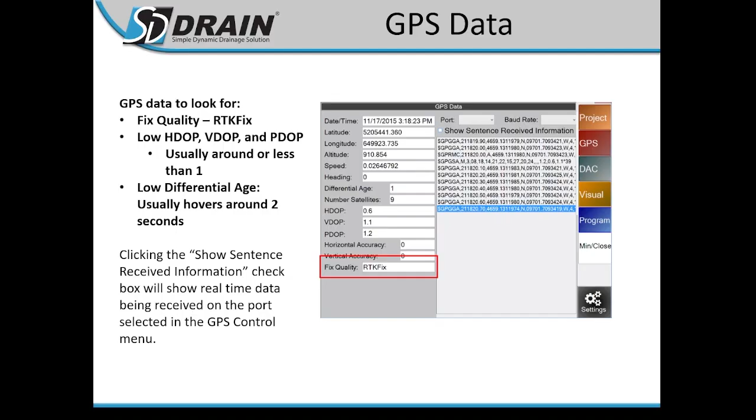Benchmarks. So we have a function called a map benchmark, and what this does is it actually shifts your map.

So what you can do is actually correct this in the field. You don't have to bring the maps back out, you can do all of this in SD Drain. What I'm going to do is go to GPS benchmarks, tap on the map function, and it's going to walk me through a wizard.

I haven't seen this happen too often in the last 5 years, but if you get somebody who doesn't GPS map the data to the world or to the right benchmark, you can get a shift in your map. But at least we give you a way to fix it in the field instead of taking it out and having your guy fix it.

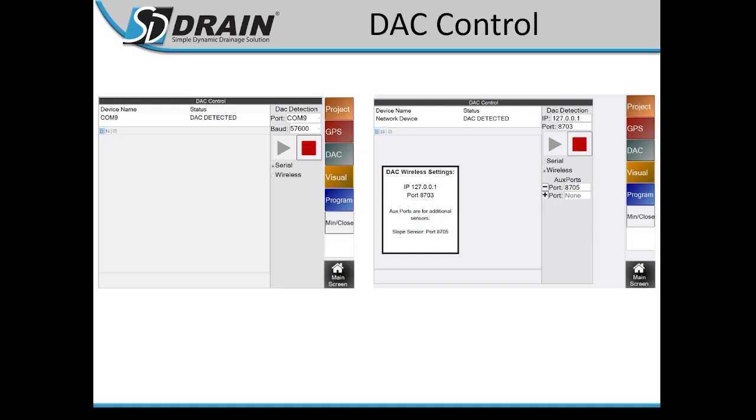So DAC detected, just showing you there what it looks like. DAC data, again, showing you slope data coming in. There's a pitch and roll message associated with when you have a slope sensor, so it does measure the roll and the pitch of your machine.

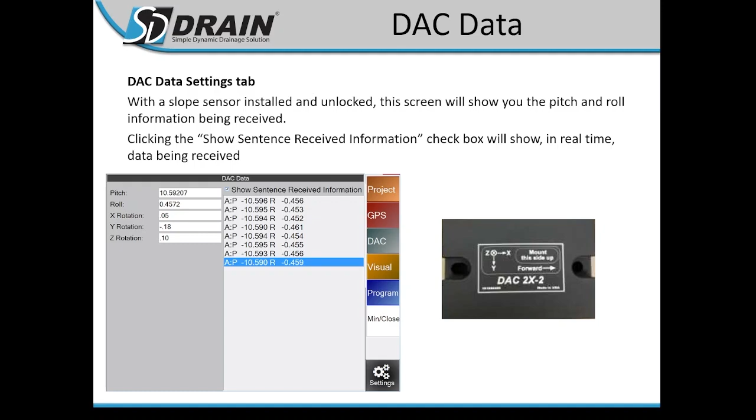DAC settings, again, you shouldn't have to check these when you go into this page. This automatically reads from the controller what's activated, so you don't have to check anything. Just know that it auto populates when you connect stuff up.

Google Earth. If you have Google Earth pre-installed on your tablet, you guys can export your ditch lines and map them or lay them on top of Google Earth and then print off a nice picture, to keep for your records, show your landlord if they're curious as to what work you're actually doing.

Can we run to sddrain.com quick?

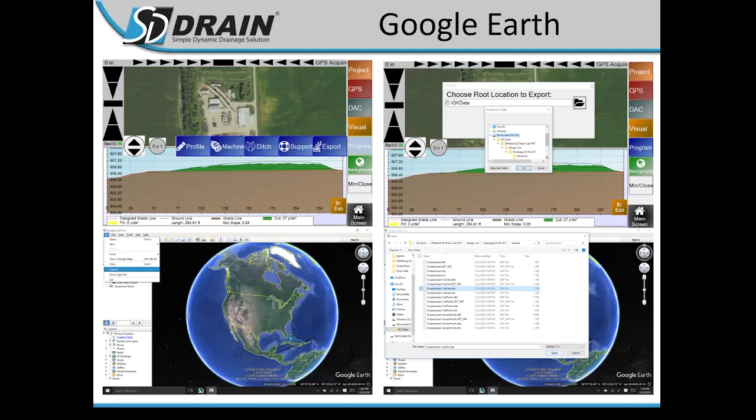So let's go to the support tab, go to training, go all the way down to the bottom. If you're looking for details on how to install Google Earth and more Google Earth information, there's a video for you right there. So it's on sddrain.com, go to the support tab, go to training, and then go to the bottom of the page. There's going to be a more detailed, about a 7 or 8 minute video that'll show you exactly what's going on, and it's pretty cool what you get.

So if I go back to my slides here, here's my export, double click the KML, and then what happens is it actually just lays it here on top of the ground. That red line right there that you can hardly see, that is my ditch that I exported. Now what you can do is print this off. It allows you to put a title, and then print it off, give it to your landlord, keep it for your records, whatever you guys want to do with your data. We just give you a way to print off your work.

DAC connection and what to look for. Everybody running the new tablets with the wireless connection to the DAC 8000 has to have a blue light, so look for the blue light when you're setting up for the year. Everybody running a John Deere Globe or Trimble Globe or a smart antenna, you guys have to have a green light as well. So look for blue and green.

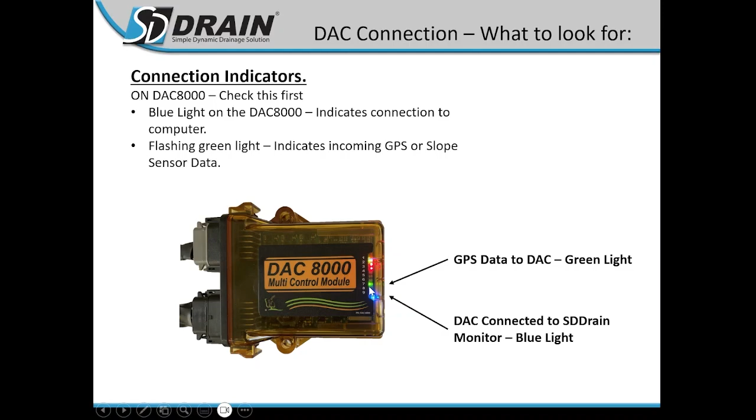As far as GPS goes, if you're running the PX5 Rover, that is a hardwired GPS receiver, so you will not have a green light. So just be aware of that, the two differences. Everybody has to have a blue light, but not everybody has to have a green light. So just troubleshoot according to your GPS and what you have if you're having issues.

DAC basic tuning. The easiest thing you guys can do to fine tune your machine is raise and lower your hydraulics. If you think your scraper is really jittery, going up and down all the time, lower your hydraulics. These things don't take that much flow to control, so just lower them down. I've seen guys with high flow pumps running down to like 40 or 30% when controlling. Just be aware of that.

If raising or lowering your hydraulics doesn't help, there is a DAC tuning page. Go ahead and close SD Drain, go into DAC config. This big window will open up, and you're going to click on the tune window, and a smaller tune screen will open. There's a couple things here.

We've got some sliders on the left side of the page. The green one is your up movement, the red one is your down movement. To test these, you have to enable the control on your tractor. Red case tractors, you can do this sitting still, along with external valves. But John Deere guys, you have to be moving or just creeping. So I always go first gear, throttle back, and then do your tuning.

What you're doing is moving the slider just until you see the implement move, and it only has to move a tiny amount, like an inch every time. When you click the button once, it should move about an inch. For the up motion, lower your blade a little bit so you have room to move up, then enable your tractor, and keep clicking the up arrow until you just see your implement move. You click it once, the implement moves about an inch.

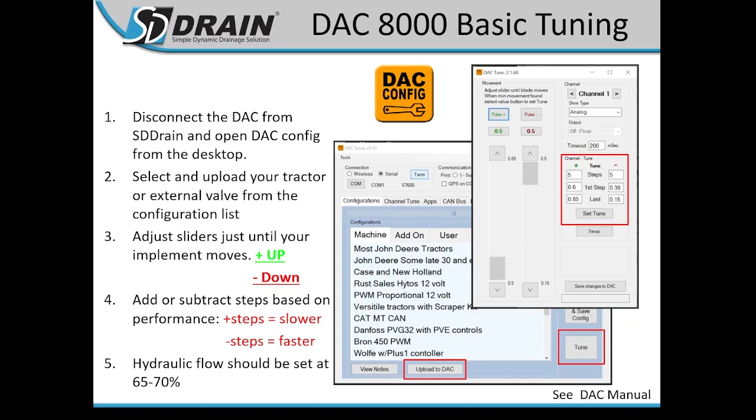Topography maps. If you guys are looking to get into maps, if you're not a local guy, check with your dealer to see if they have a solution for you, and show them our manual. In the back couple pages, there's a section that goes over the type of map we need to work with SD Drain. Most of the time, if they can make the maps, they're probably running ADMS, which is the software. GK Technologies owns ADMS, that's a mapping software, that's what we use it for. It'll create topography maps and all the maps you need to work with SD Drain.

They also own SD Drain products as well, so it's kind of a sister company, sister programs, whatever you want to call it. They work well together. Otherwise, you can get other maps in other ways - if your dealer has a way to do that, great. If they don't, we can help you out and get you some maps made. So this is what they look like. Again, if this is a whole field, all you're doing is driving out here, start surveying all these black solid lines, and you're off ditching.

There's no question on where the ditches need to go. So whether you're in super flat land or super rolling hills land where it's hard to see where the most effective way to drain water is, get these maps made and they'll show you exactly what's going on in your field. On the left, we have a watersheds map. The different colors indicate where the different areas of water are flowing. All of this red has a common exit point in the field, right up here. All of this blue has a common exit point right up here. Same with the green and yellow, just all the different watersheds throughout your field. And then a topography and elevation map on the right.

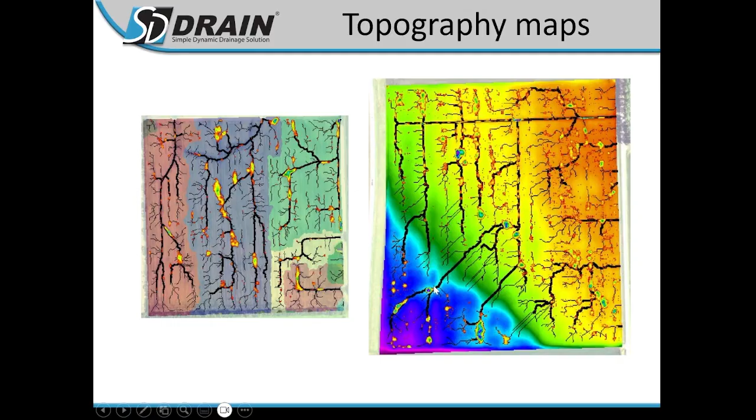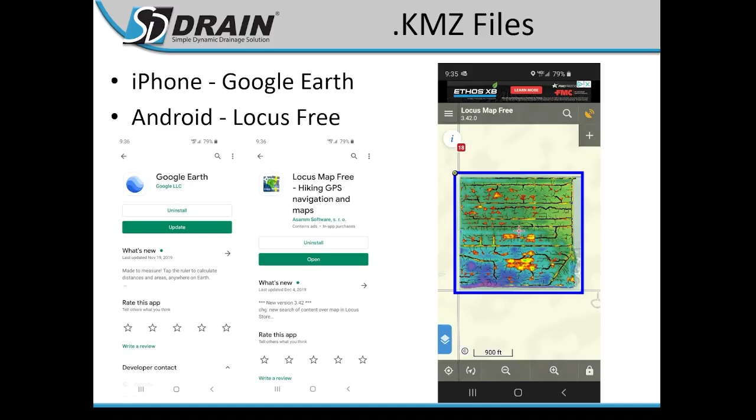KMZ files, if you get maps through us, you also get KMZ files, and you can upload these to your phone. It's nice you can view this on a smaller device. If you need to quick go out and do some field scouting, give it to the co-op guy so when they're spraying and there's a 2-foot canopy in soybeans, you can see exactly where the wet spots are to potentially keep them out from getting stuck. So, KMZ files. That is everything we have as far as ditch goes.

Scott, did you want to talk about the SDDrain.com? Let's go to sddrain.com.

We had talked about this a little bit at the beginning. Big thing for you guys is if you go to the support tab, let's go to our first thing, troubleshooting. So under the support tab: how do I register my software, why don't I have a GPS signal? That's one of the big ones we get. If we look at why don't I have a GPS signal, just read the first sentence. Luke had talked about which lights are turned on the DAC controller—that's going to be a power issue. If the power issue is not happening, you go on and click the next step. And then this is going to be a troubleshooting tree, and we'll just go through step by step to help you solve this issue.

If for some reason it's a time of day or on the weekend when there's a tech that's not available to answer your questions, this is a great resource for you. If you get through all the different sections and it gets to a spot where there's a larger issue than this tree is going to be able to solve, it'll end up saying call for support. But this is a great way to set stuff up.